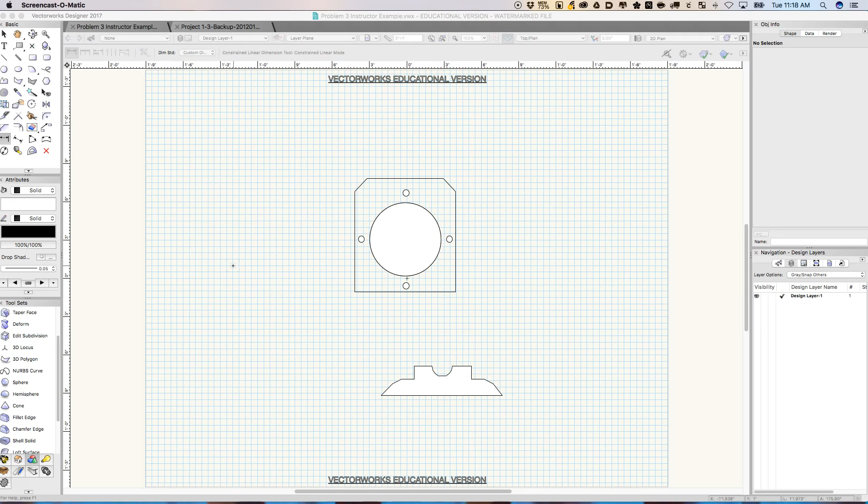Here is problem number 3 for advanced drafting. Let's take a look. I'm not exactly sure what problem this is based off, but it is an intro to CAD problem. This right here is what you drew. So I have this guy all set up and all resized correctly. Don't worry about this guy down here at the bottom. I will show you what this is in a little bit.

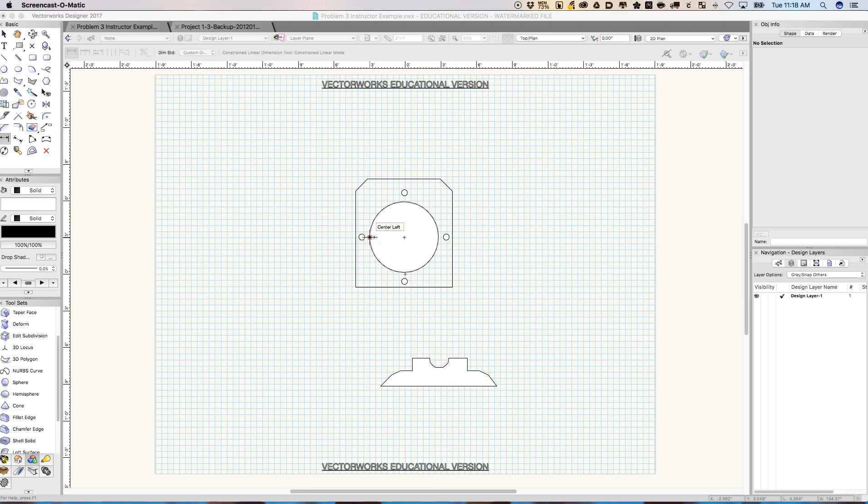The first thing we're going to do is we have our piece here, and we're going to extrude it. And then, as you can tell, the one big hole and all 4 holes are subtracted out of this big solid piece. So the first thing we're going to do is extrude this big piece. We need to compose, sorry about that. We need to make it into a polygon.

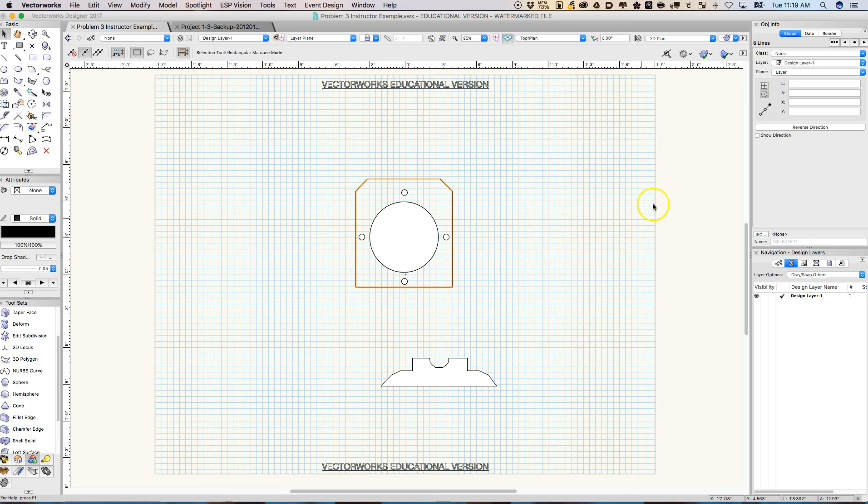So what I'm going to do is select all. Looks like there are 6 lines. Come up here to modify, compose. Now we have a polygon. Now I'm going to make sure there's a little fill in there. And now we're going to extrude.

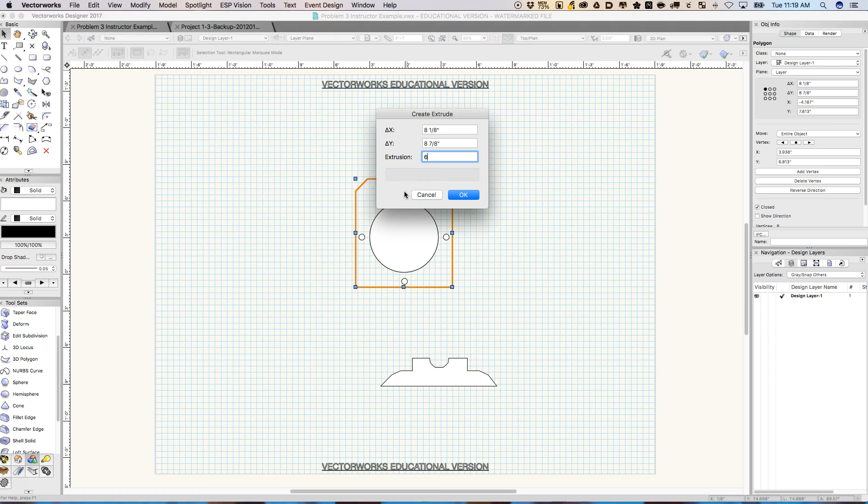And it looks like by looking at the front view, this object is going to be 6 1/8 inches. So I'm going to come up here to model, extrude, 6 1/8 inches. Okay. Now I'm going to look at it in isometric view. Look at that. There we go.

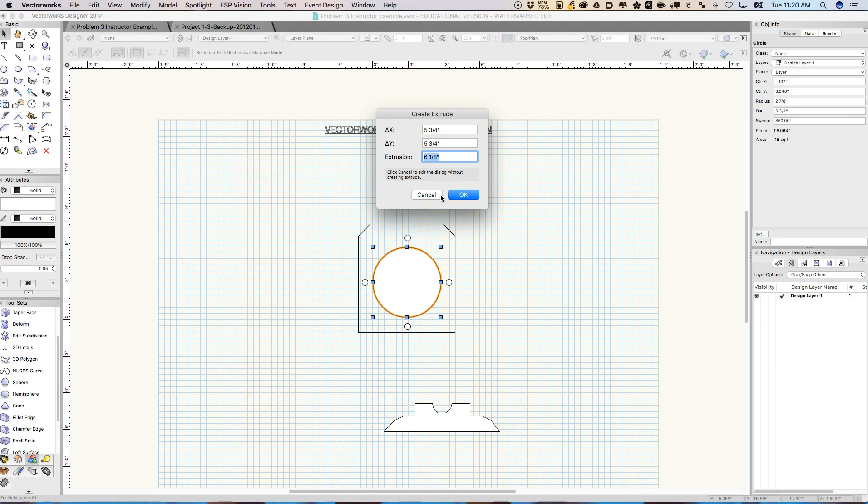Awesome. So now I'm going to come back to top view, and we're going to do this big circle here. So I'm going to extrude this circle, and again, it needs to go all the way through, so it needs to be bigger than 6 1/8. So I'm going to make it 8 inches. Let's go up here to model, extrude, 8 inches.

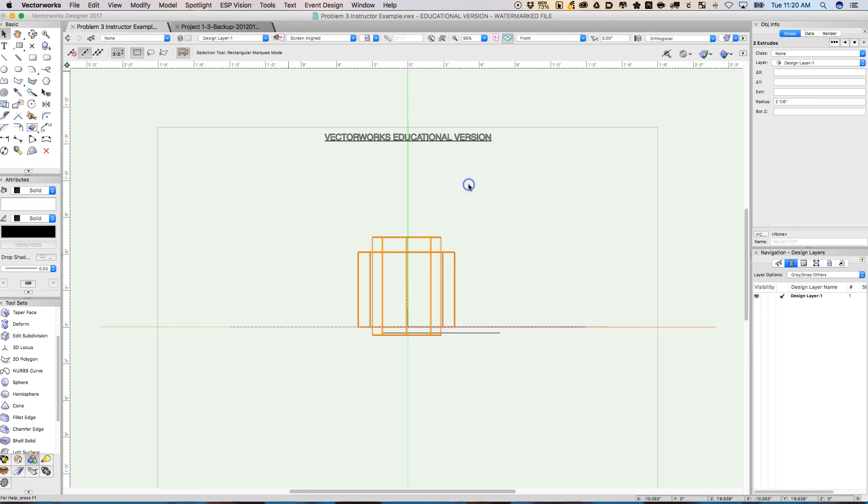Come to front view. I'm just going to, again, nudge them down. I'm going to select both of these guys here. Model, subtract solids. This is what I want to have it to be subtracted from, so we're good. Click on OK. Now if we look at it in isometric view, there's our hole gone all the way through. So let's go back to top plan.

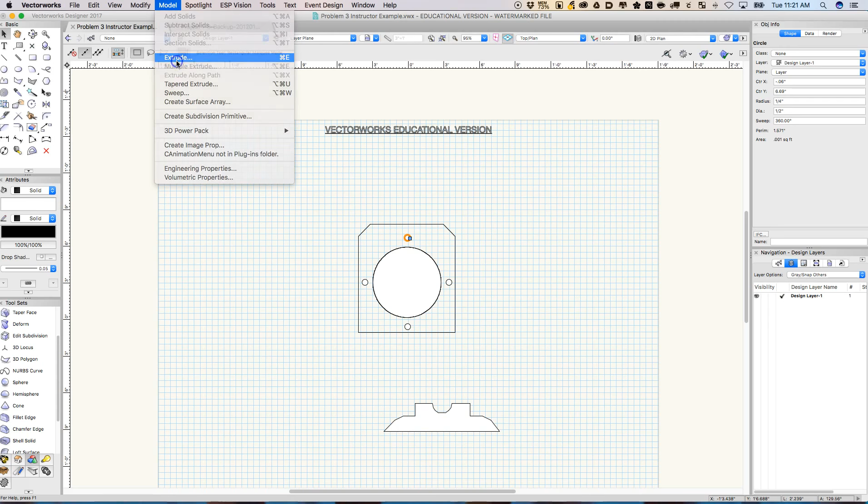Now let's do this first guy here. And again, the hole's going all the way through, so I'm going to extrude him to 8 inches. So model, extrude, 8 inches. I'm going to come back to the front view and get them all nudged into place. All right.

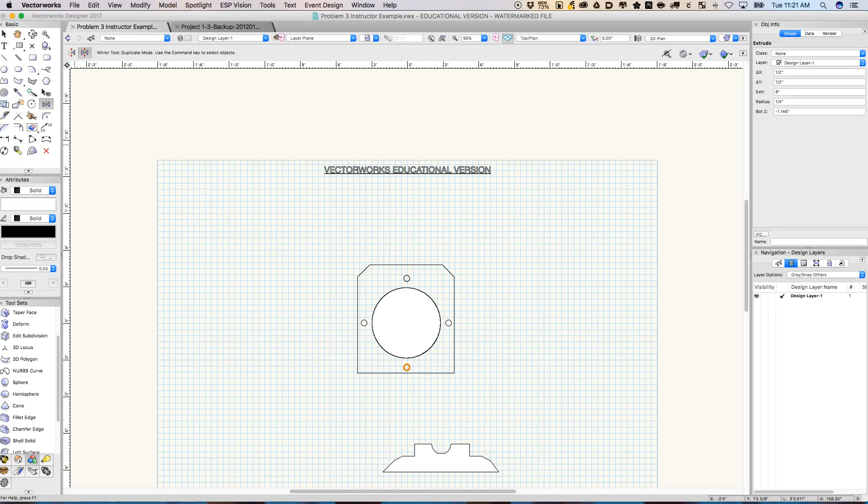Now I'm going to take this guy and delete him, and I'm going to mirror it over. Okay. I'll just do this guy. I'll extrude, Control E, Command E, 8 inches. Look over again, front, and nudge him down. Again, Shift key and the down arrow. Back to top. Let's delete this guy. We'll mirror him over.

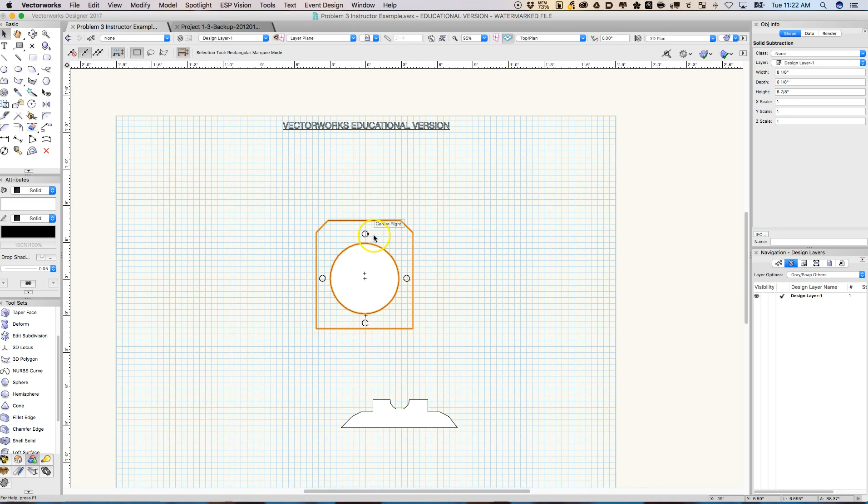So now we're ready to take these 4 guys out of this big piece. I'm going to select all of these. I'm going to select this big piece. I'm going to select these, and we're going to drill all 4 holes at the same time. Come back to right isometric. Okay, now we have all 5 objects selected, the 4 cutting tools, and then the piece we're going to cut from.

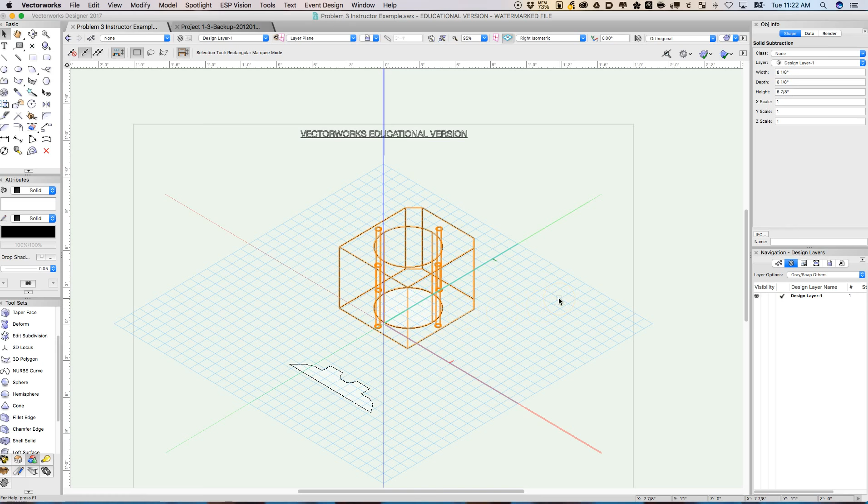Come up to model, subtract solids. Now, again, it's selected correctly. I'm going to click OK. And there we have our 4 holes drilled, subtracted from the main piece.

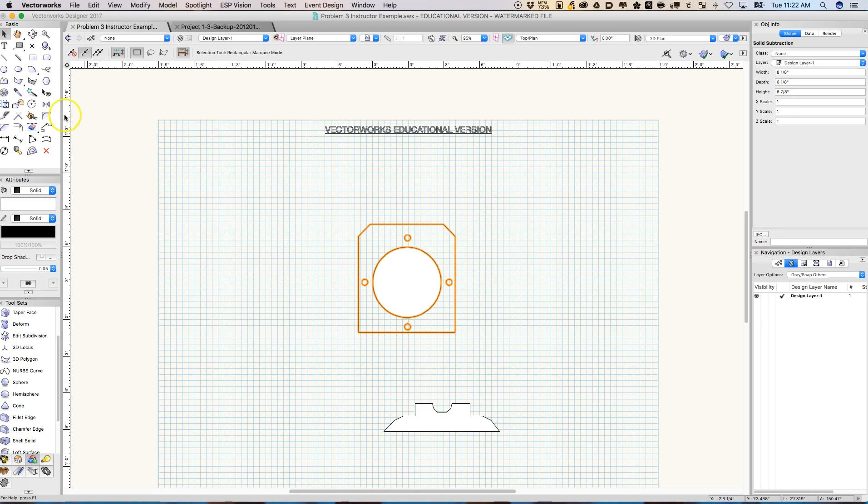Back to the top view. So now we have everything, now we have the main piece done. And if you look at the front view on your problem, there is a particular shape on the bottom. Now what I did, as you can see, this is the part you're just going to have to read the drawing and draw it.

I drew this based on the dimensions in the drawing. So that's what I've done, and I've drawn it, and I've turned it into a polyline already. So I drew it, selected it all, composed it, and now we're set. So now what I need to do is extrude that, and let's look at this guy.

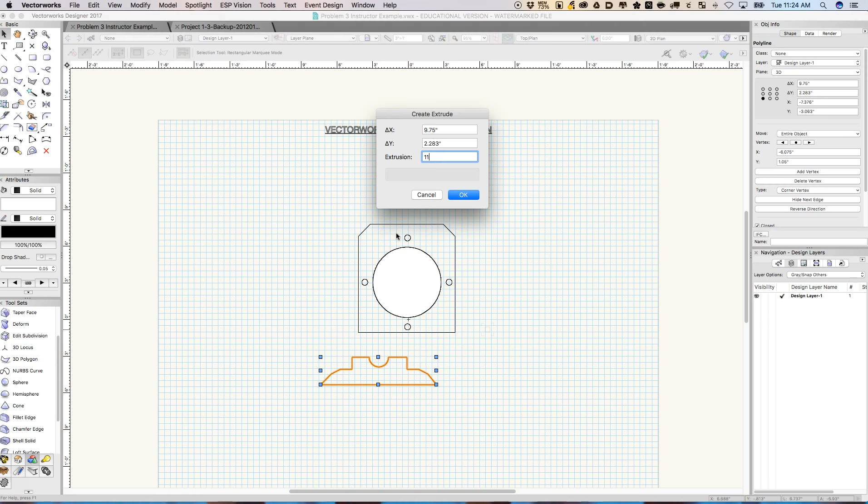This guy, if we look on the top view, the length of it is 8 7/8 inches. So what I'm going to do is extrude this guy. I'm going to extrude him to 11 inches. So I have him selected. Command E, Control E, 11 inches. So now let's take a look at this in isometric.

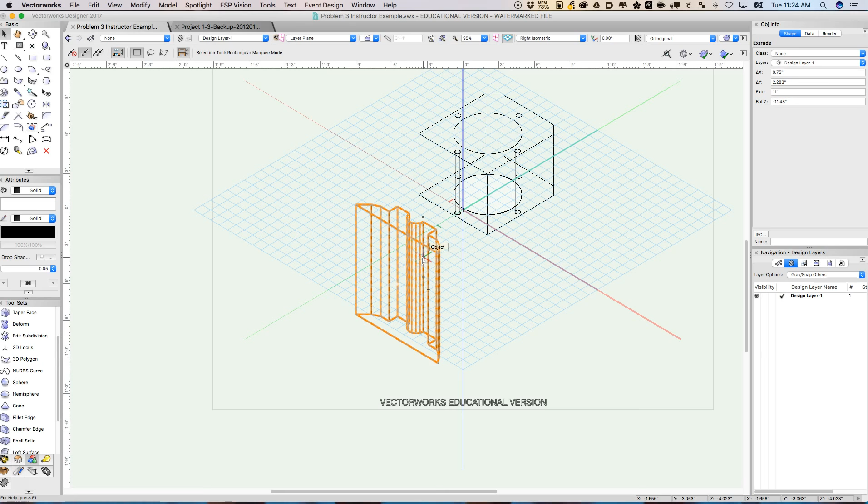So you see the problem here. Here's our piece, but it needs to be cut off the bottom. So what we're going to do is rotate this so it's in the right plane, facing the right direction. So I'm going to look at this in right side view. So here's our two pieces. I'm going to move him down just a little bit.

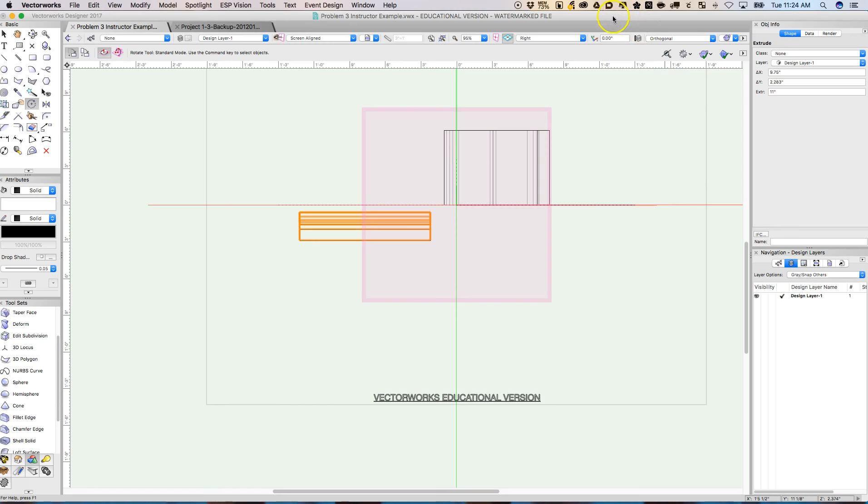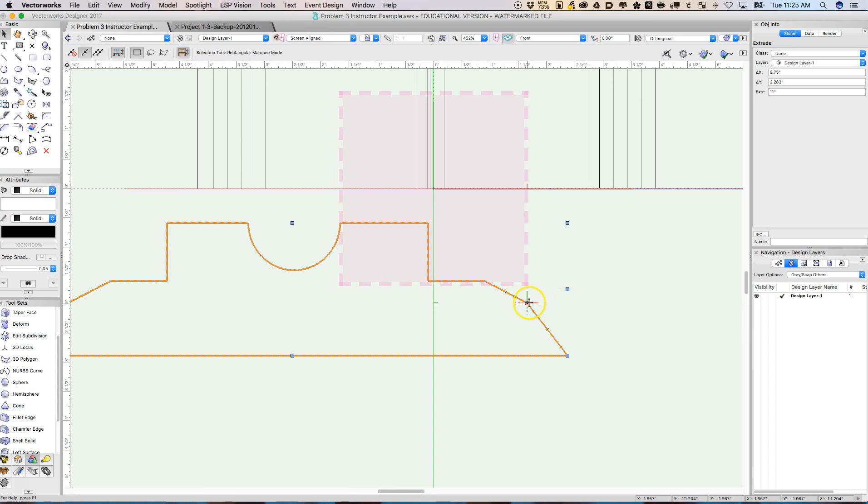And now I'm just going to use the rotate tool, just like we did in intro. Rotate them up. Now it's almost in the right spot. So now we're going to come over to front view and place this guy into location. I'm going to grab this piece right here, come up, and snap him up right there.

So now you notice, if you look at the bottom, I've extended this cutting piece. Remember, because it has to extend beyond the object we're cutting. So if I dropped it down right here, I don't know if it would cut all the way through, so I just extended it out so it looks like this. And it's snapped all the way into place right now.

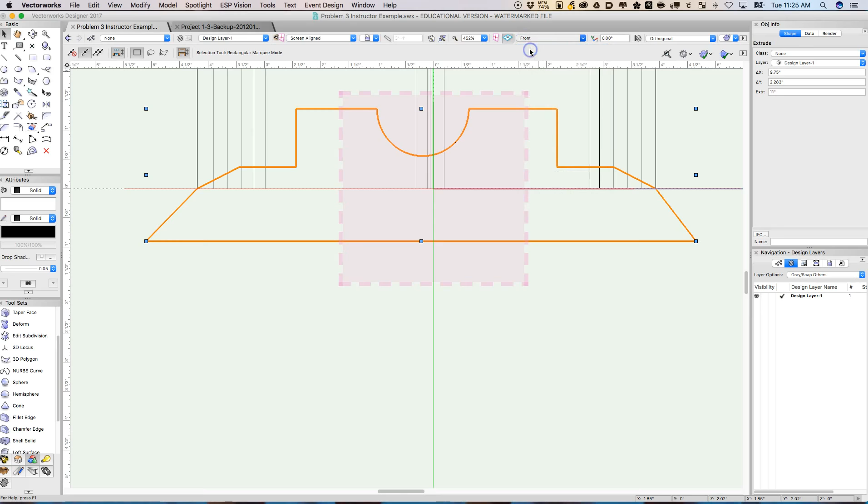Now I'm going to come and look in the top plan view, zoom out a little bit. And now we just need to slide this guy in till it's here. Now here we are. It's going to go all the way through. So now I'm going to come down to, I'm sorry, right isometric. I'm going to select everything. See what happens. Do model, subtract solids.

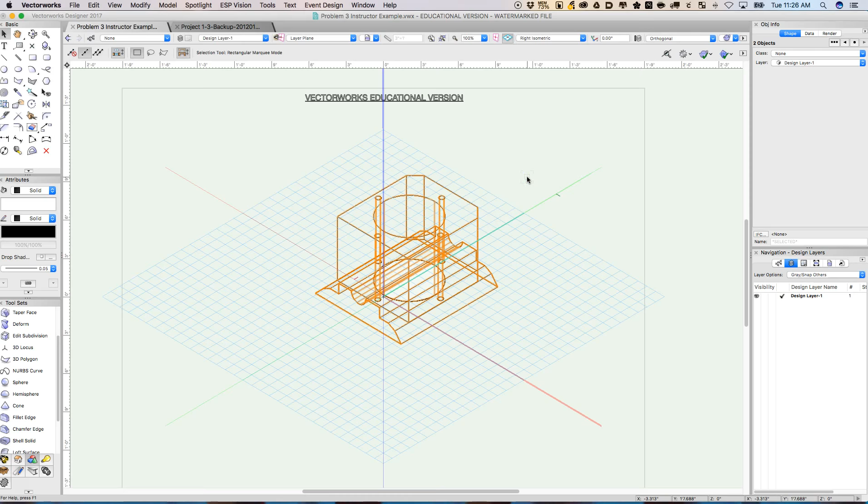There were objects selected that are locked or illegal in 3D have been deselected. Okay. So let's give it another try. Modify, model, subtract solids. Okay. That looks like it's right. Click on OK. And there, it took it away.